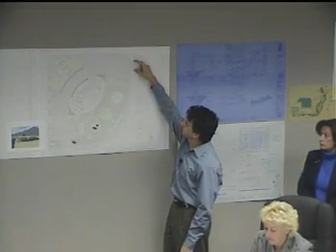There is perhaps either a one-way out or maybe just a fire lane exit here adjacent to the existing curb cut. Depending upon how this develops as we get into working with fire and other people, this may become an exit, but our intention was that it would only be one way so that people aren't cutting across multiple lanes there, so it stays safe.

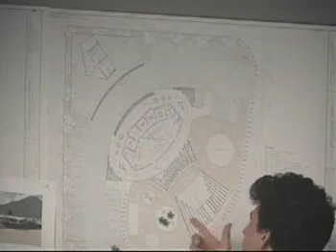So that's the first thing. The parking goes in. The other thing in option A would be to keep the existing square footage in the building, approximately 2,300 square feet, and arrange the spaces in a way that would accommodate tourism, the tribe, and then a couple other entities that are also wanting to be in the space, the National Monument people and the BLM people.

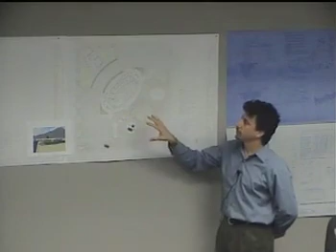Having those entities in here presented a bit of a problem. So from there, we moved into some site planning where we could get the National Monument people and the BLM people out of the building and do what they do best, which is talk about the National Monument, the beautiful mountains and climate zones and things we have. By doing that, we propose to have a few little display areas out here. So the main intervention is parking and arranging the spaces to accommodate, in a smaller footprint, all the necessary functions for tourism and the tribe so they can do what they do.

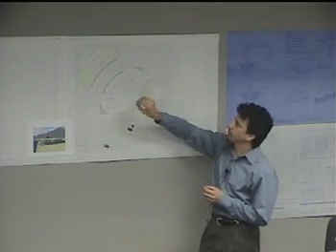When we go on to option B, there is a restroom facility placed at the northwest corner of the site, on axis with the existing building. That came out early on when we identified there are only 2 single-occupant handicap restrooms on site, and it was determined that the 2 they have now are inadequate at present, and to have 2 with a larger facility and more foot traffic would become even more cumbersome.

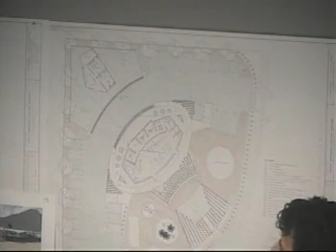So the first option was let's get rid of one of the restrooms inside, have an employee-only restroom, and then have a standalone building that would act much more like a visitor center that one would go to off of a major thoroughfare, just like coming into town. So that's option A, and option B with the bathroom facilities back here.

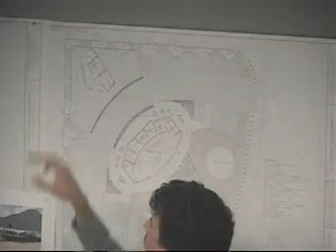In that bathroom facility, there's also a vestibule with an area for vending machines, and also storage. Both tourism and the tribe have boxes of things that they go through quite frequently, so having an on-site location to store the overflow things they would have was also something we determined early on. So that's option A and option B.

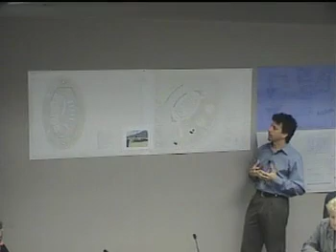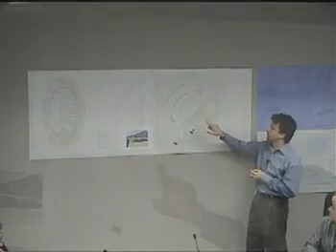Option C really looks at how do we handle and claim this area out here in a way that makes the whole project come together as one cohesive design. Out here, there's a small landform that acts as a backdrop for lectures, for gatherings of groups of people, could be school children and things. This green area is slightly sloping up, acting as a landform, almost like a small amphitheater, so that the BLM people could be here, the National Monument people could be here, talking to groups.

About the general desert environment, as well as the Modernist Committee people could start their lectures in town from this location. So it's a multi-use sort of area out here, but it's not claimed with any hard building, it's rather just landscaping and land forming.

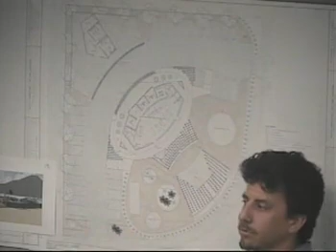The last little item over here would be, in the future at some point, if the National Monument people or the Bureau of Land Management people came in and had the funds to have their own building, we've identified a small area here for a structure. That pretty much handles the site planning, and I think Anna's going to talk about the interior design of the facility itself.

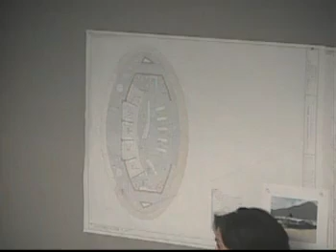One of the ideas we explored was, due to the nature of the historical features of the building, we agreed from the onset to approach the design in a way that we wouldn't touch the existing structure. So our intervention is really divided into two areas. One is the creation of a lobby, a place accessible to the public, which is separated by an elliptical wall, made out of 2 layers of glass with some sort of structure in between in order to create a translucent screen and give some privacy to the tourism people.

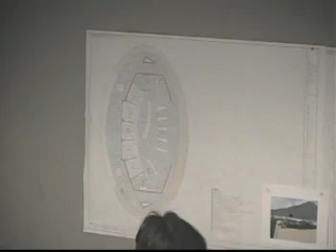We have 2 counters, one for the tribe and the other one for tourism. We are keeping one toilet for tourism, and we essentially are trying to maximize the existing area in order to not only enhance the architecture, but also the placement of the counters will be done using essentially the same grid that Albert Frey did use originally.

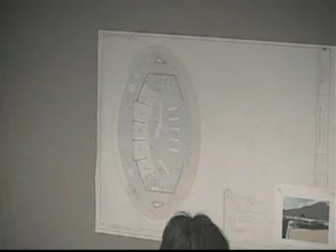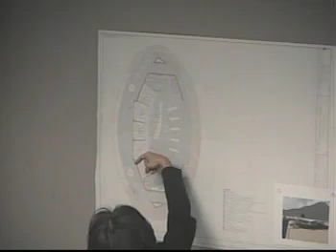One of the problems with this building is that it's not ADA compliant. We are extending the apron in order to have enough outdoor circulation. We would like to have all the displays essentially hung from cables or guy wires, like Albert Frey did in his early designs. And we are placing the tourism staff in a sort of circular fashion.

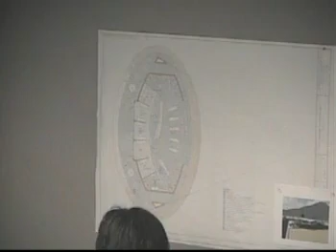We have storage, a small break room/workroom that would also act as a place where they collate papers and stuff like that. We have essentially 4 workstations in the manager's office. The vernacular of the furnishings will be done with steel, glass, and wood, in order to continue with the same sort of architecture that is very appropriate for the building.

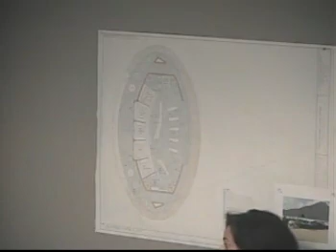We're intending to maximize views. Therefore, that elliptical wall, the circular wall, is just going to be 7 feet, acting more as a partition. We have a small area for videos. We're maximizing every single square foot of the building without really hindering the quality of the space.

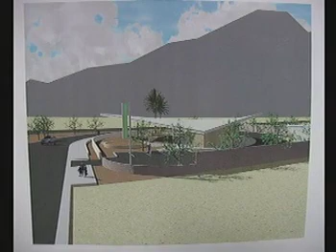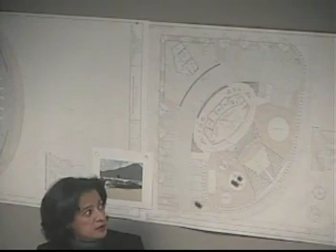Did you mention that we're going to lower the wall? No, I didn't mention that. Yeah, the main wall, which is the plaster wall, is currently between 7 and 8 feet. It will come down to 3 feet in order to make the building more visible, because apparently that's one of the complaints from the public. And I think that's it.

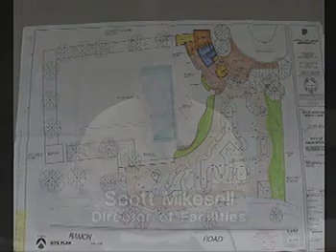The most workable option that we see is to take the building and try to shift it to the east. That would allow the skate park to be built. We would not have to demo the existing building, but obviously we wouldn't meet some of our original goals that we had attempted to meet with the project, which was to have a new facility, a joint use facility, new and additional restrooms to service the skate park. We would also have a monitoring issue because the building's kind of in the way visually from where the skate park would end up.

But what it does accomplish is that we could build the skate park within the funds that we have. This has been a long, long project. And then obviously the one other option is to go as bid, but that is substantially more money, and we didn't feel that was much of an option given our current budget situation.

And then our third option was to start over, and that really doesn't work very well either. So we've tried to come up with a workable solution, given the nature of our situation and the funds available. One of the things we did early on with the project, spelled out in the sheets you have, is that because there are bond funds attributable to this project, it had to be separated out into two functions.

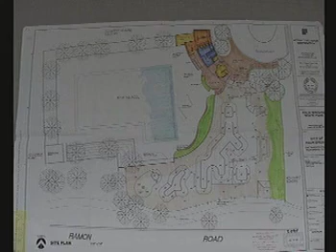What we would propose to do would be to eliminate that and tighten up the skate park. That way it doesn't change the geometry of the skate park itself, because the skate park is a highly technical item. We don't have the expertise to say this bowl should be 10 feet or 12 feet, or whether the angle should be 5 or 7 degrees. What we attempted to do was shift the project without causing complications to the critical elements of the skate facility, because I don't design skate parks. So we tried to preserve the integrity of the product, and we feel we can get there from here.

Mr. Mayor, Mr. Mills? Scott, just playing off your last sentence, you don't design skate parks, but in essence you are here in what you're talking about doing, because you're changing the way the flow here has to work. I don't design skate parks either, but if you look at the distance of that center bowl, it overlaps into the current locker area, and if you slide that over to miss the locker building, you've got just enough space going right up to the property line of the school district where their fence is now.

You've got a condition which means you lose that ramping area right there. I don't know what that ramping area is, maybe it can be lost, but there's still some kind of connection that has to happen there. Also, if you look at the grade differences, you've got a berm which negates a retaining wall. Now you're going to have to move it over, and you'll have a retaining wall condition at the fence. There's problems, there's costs, and other things that are going to happen with doing that.